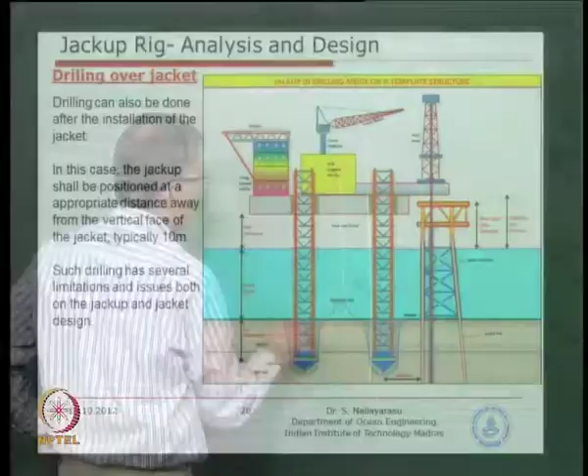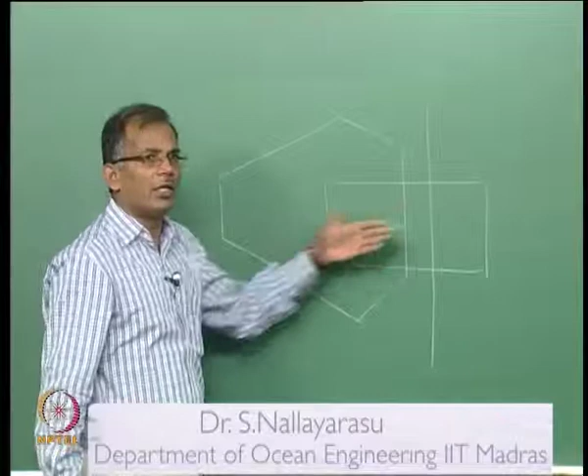Normally, when you arrange a well bay, the first thing we need to look at is which particular jack-up rig we are going to plan to drill with. Typically, I will make one sketch: this is the edge where the jack-up rig is going to come, maybe something like this, and the jack-up rig has the capability to travel in the direction of its length and also in the other direction.

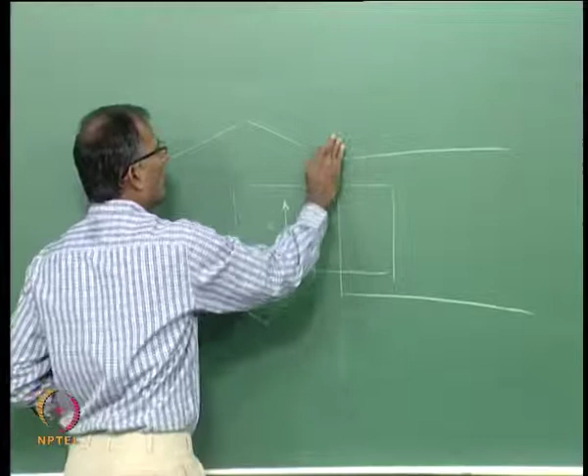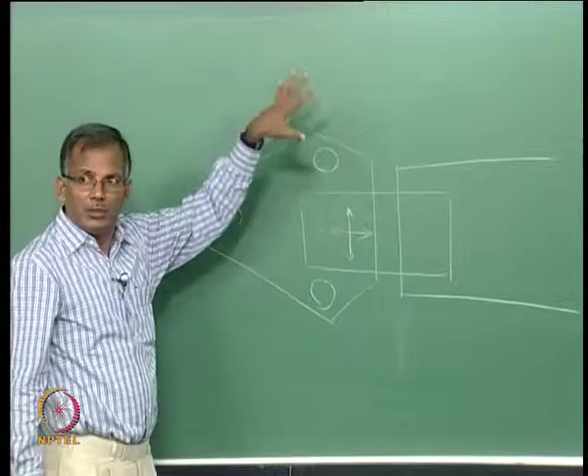Now, if this is your well platform, depending on what is the transverse direction the drill rig can move, because you are not going to relocate this jack-up rig. You keep the jack-up rig at the same location, not moving; only the mobile platform on top of the jack-up is going to move forward, backward, laterally, transverse in both directions.

Now, if this is your jacket leg, what will happen is you try to arrange, say for example, a 3 by 3 matrix of wells. Now, the distance between each well is the biggest question, depending on the diameter of the well and also the other equipment attached to it.

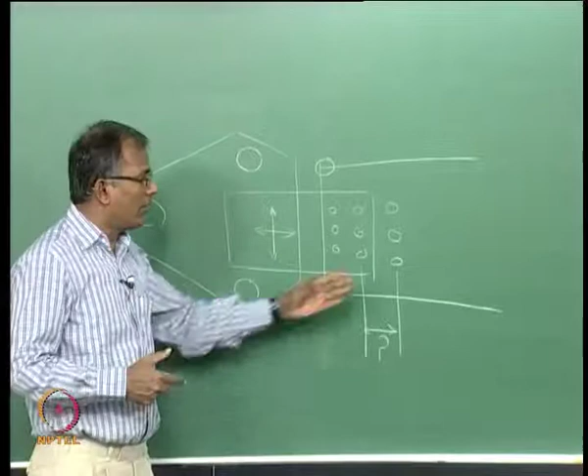I think I have shown you a picture some time back, an instrument called Christmas tree which is mounted on top of the well, which is basically a pressure and flow control regulation device with many valves. So if you draw a dotted line around what is installed on top of it, you can calculate the diameter of the obstruction-free space required.

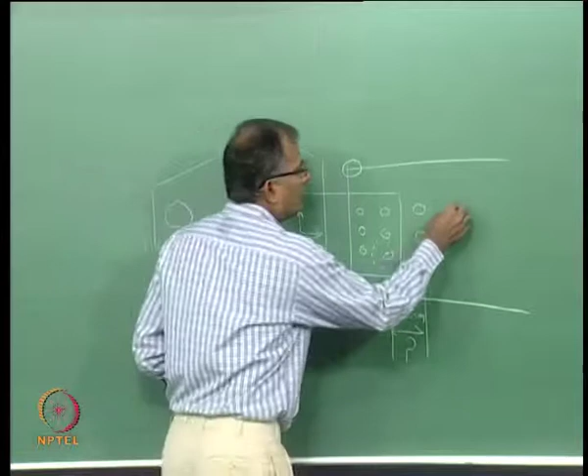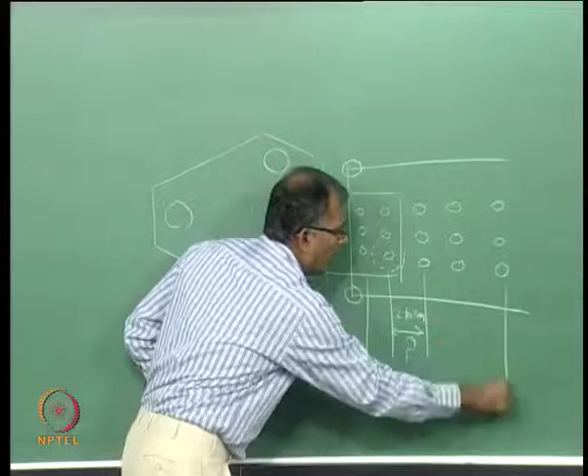Typically this is 2 to 3 meters. Now, imagine I want to have 20 wells; this will give you 15 wells. So I cannot keep on growing, because by the time I reach this well the distance would have already become 1, 2, 3, 4 into 3 meters, 12 meters, which the jack-up rig cantilever cannot reach.

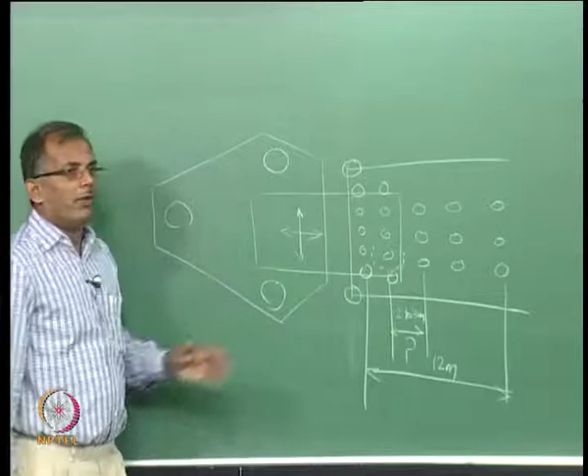So I decide to go, for example, for additional wells in the transverse direction, provided what is the travel mode of the rig, because on top of this, if I can travel this way too, I can achieve maximum number of wells.

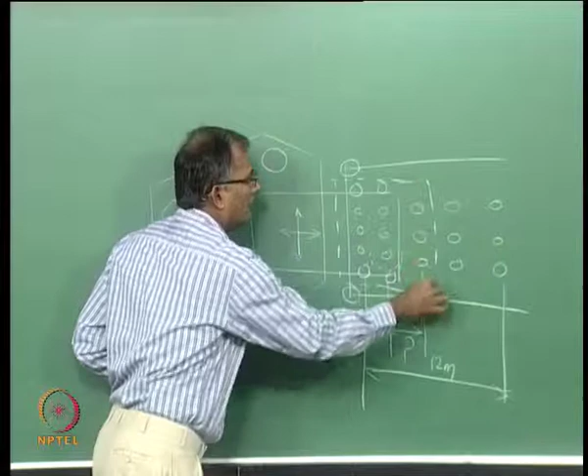So before deciding the jacket design you need to decide what jack-up, which are the potential possible jack-ups you can hire, because you will never know, you are not the owner of the jack-up, it is going to be hired by the oil company. Sometimes big oil companies do have their own jack-ups.

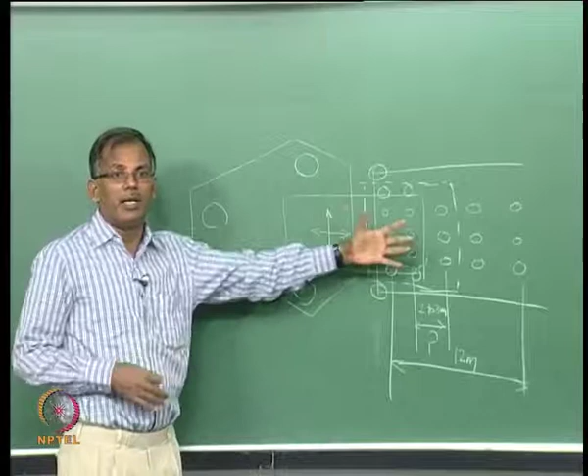So once you know which jack-up you are going to use, then you configure the number of wells and then design the jacket. So you can see the linkage between design of the jacket and the jack-up rig availability and suitability for that location. You may have a jack-up rig, but it may not be suitable for that location because spud can penetration is too much, or maybe the design is not sufficient.

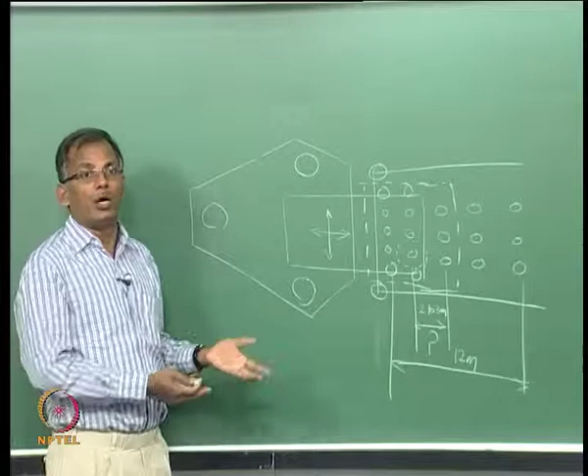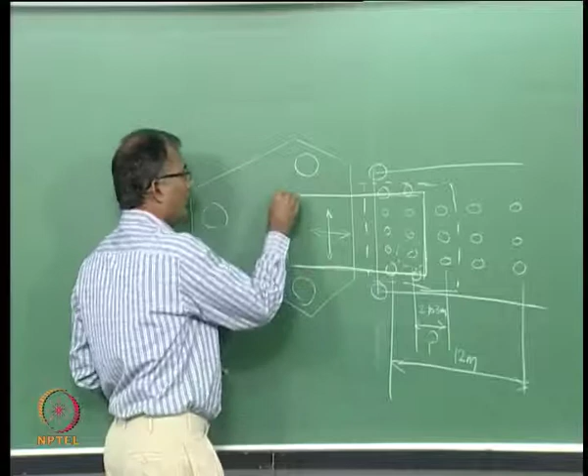So there are many complexities in arriving at the well configuration, all depending on the movable drill floor, its forward and backward movement and transverse movement. This is something you need to keep in mind whenever looking at a jack-up for the design of fixed platforms. For drilling purposes, you must look at the capability of the drill floor movement longitudinally and transversely. And as I mentioned in the other class, the height also matters.

For example, if you go to the Middle East, Gulf countries, so many offshore platforms are there. As I mentioned, the wave heights are very small because it is a sheltered area; maximum wave height you will get is maybe 11 meters, 12 meters. So the structure height need not be very high because the wave crest elevation is going to be smaller. So no issues with jack-up, because jack-up can go up to 23 meters, 24, 25 depending on the case.

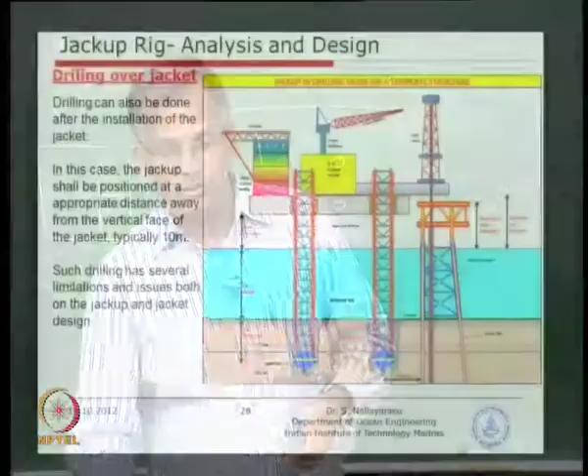Whereas when you come to some other locations, the wave height itself is 23 meters, then there is a clear space requirement. So the structure goes higher and higher, but jack-ups cannot get elevated so high because of the limited availability of leg length.

The same jackup can work elsewhere, but cannot work in other locations. So, you have to look at all these parameters, not just assume that any jackup can go anywhere and drill, which is not a realistic idea.

So, you need to look at all the parameters related to that particular location, starting from soil, sea state conditions, type of drilling, well dimensions - all those things need to be evaluated for each and every location when you are planning to do a jackup drilling activity.

Typically, the cantilevers for most of the jackups - the vertical face of the jacket from here to the distance between the jacket and jackup - is typically about 9 to 10 meters, depending on the design, because this really matters. The closer you go, the interaction between the jacket and the jackup is going to be more, meaning the disturbed soil will degrade the capacity of the jacket.

So, we want to keep it more spaced out, but if you keep it more, we have bigger issues with the actual purpose for which the jackup is designed, because the drilling becomes very limited. If you go too close, your jacket becomes a problem. You may also get into problem with the jackup, because there will be movement of the jacket itself, so the interaction becomes quite substantial. So, we need to find a balance. The typical number is about 9 to 10 meters, that is the kind of spacing we are looking at for most of the shallow water jackups.

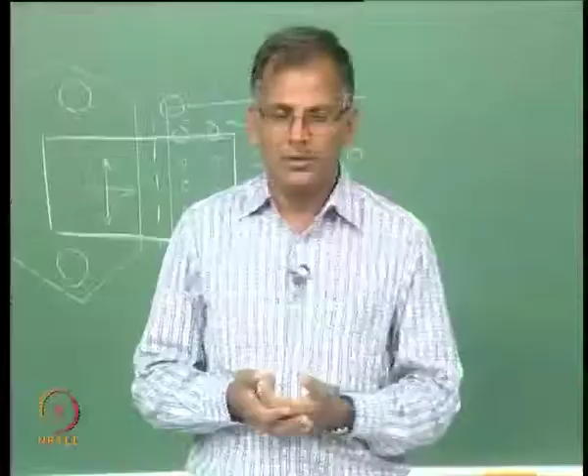Basically you can think of it again as the reverse process, but it is not exactly the reverse process, because you may not be able to pull out very easily, since all the soil has already collapsed into the pit created by the movement of the spud can during the installation.

So, what happens is, over a period of time - if you are drilling for say 3 months, 6 months, mostly not less than 3 months, because you don't want to mobilize a drilling jackup for drilling only one well, you will drill 3 wells or more - it may take several months.

So, during the process, the sea state conditions may change, wind conditions may change, and the debris and soil which actually came out during the installation may go back in, and also sedimentation of materials brought from elsewhere due to the subsea current can get deposited into the hole. So, slowly it gets consolidated and settles down.

So, what happens is, you have to pull this leg against the soil capacity, which we call the breakout force, to get the soil failure in the vicinity. This capacity could be substantially more than when you were installing - you were not encountering this problem then. So, what we need to do is figure out how to reduce this breakout force.

Either loosen the soil, maybe through a process of water jetting around the legs to loosen the soil. But a potential problem with water jetting is it could actually damage the jacket, because the jacket is in the vicinity, very close, 10 meters away. So, if the water jetting is not done properly, you may actually collapse the soil in the vicinity of the jacket legs, which makes the pile fail, and that is not very good.

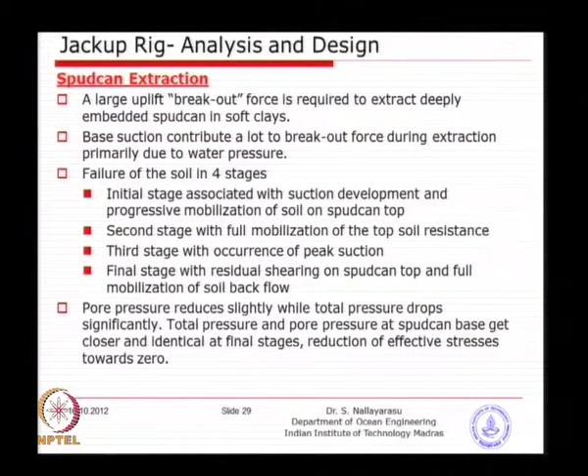So, the basic idea is - I have prepared a few sketches to show what really can happen - because the spud can is designed so it can go down easily during installation, with a downside cone with a very sharp edge which facilitates going down. But at the same time, we also have to have an upside cone, so that when it is trying to come out, it can also come out easily.

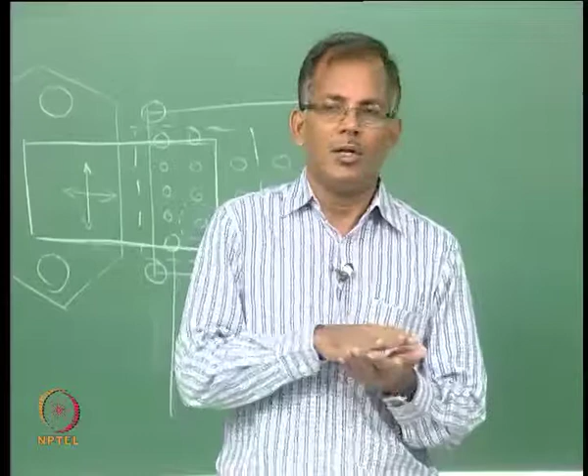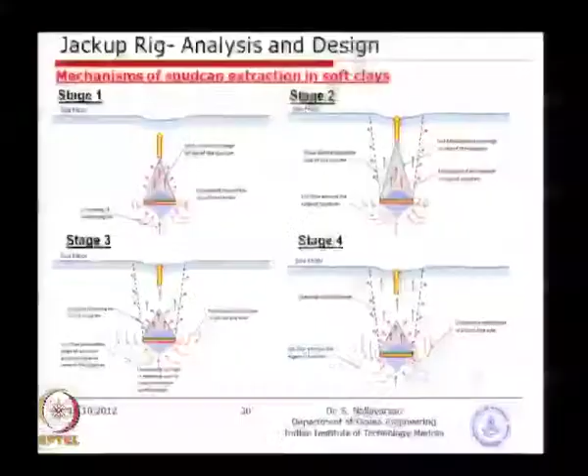Imagine if you have a flat surface, what will happen? It is very, very tough, because then you are actually going to lift off the whole soil, which will take a larger effort in bringing it out. So, you just make a slightly reverse tapering arrangement. These calculations need to be made depending on the type of soil, because not all soil behaves the same - if it is a soft clay, probably it will flow downwards when you are trying to move up, but if it is a stiff clay, it may actually get stuck to it.

So, depending on the type of soil material, the various stages you could easily understand how the failure is going to happen. Basically, if you look at stage 1, it is very deep below the mud line, and when it is trying to pull off, a cone of soil becomes part of the lift process. The leg is trying to come out and it carries that much of soil, and the breakout or so-called failure plane could potentially be the conical frustum, basically the conical surface around the spud can boundary. And stage 2, as you come closer and closer to the mud line, then what happens is the cone is there.

The failure is not going to be there because it has to come out. There could potentially be a failure surface elsewhere slightly away from the cone, which is shown in the dotted line you can see here. So this could be a possible failure plane which you have to break, so that the whole soil can come out and just come outside the seabed.

And basically, as you come closer and closer, a variety of things will happen. The soil will try to collapse, because by the time you have come to this stage, almost the plane has been defined, the failure plane has been defined by the process of movement, and the soil will try to collapse and come to the underside. And if this process happens very fast, there could potentially be a suction pressure at the bottom, basically because the hydrostatic pressure is say 100 meters, and you are trying to pull off, and that pressure could be acting against. So these are the things that we need to take into account when you are trying to pull off the leg.

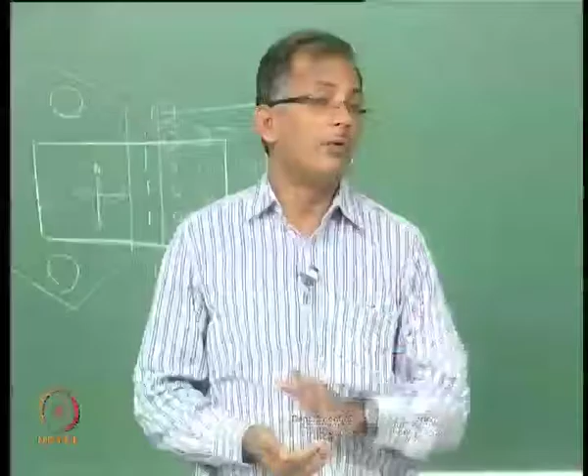So leave it for 3 months, 6 months. If there is a lot of sand transport - I think you might be doing sediment transport alongshore in your hydrodynamics course - if it is a coastal area, then a lot of sand material can get transported from one location to another, and get deposited. Then this is what normally happens.

You do not have that kind of prediction. When you try to come and remove it, you are unable to remove, because your winch capacity is already predefined. You cannot change it at that time. So that is the problem you may encounter.

So that is a situation where you will resort to water jetting, because you already have the jack-up there, you need to come out of it, and if unable to come out, then you have the auxiliary measures where you can jet water, loosen the soil, or just bring out a little bit of soil from below the mud line, and then try to remove it. This is the reason why we need to know how the spudcan extraction is happening.

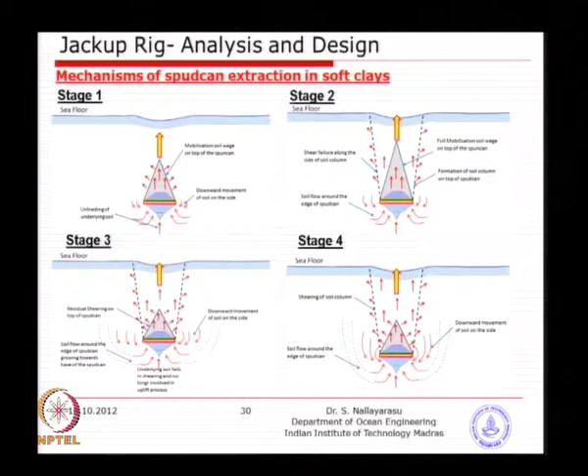This is going to affect the neighboring structures, because when you remove it like this, you may actually form a crater like this. Most of them we call a jack-up leg mark, basically the mark left by the leg after removal. So this will be permanently there. Of course, over a period of time, the soil might collapse slowly from the sides and may become a slight depression at the three locations, but over time it will get filled and may come to the natural state, but still the soil becomes quite loose, and that is what we need to know, because we need to understand what is going to be done to the jacket because of this loosened soil.

So typically for the drilling over the jacket, I think we have discussed most of the parameters - position of wells, height of the deck - I have just mentioned each of these parameters needs to be considered before arriving at which jack-up is suitable for this particular site.

So always, whenever you are designing a jacket for drilling by jack-up, you need to keep the vertical face one side. But if the jack-up is not going to come and drill, you do not need that, then you can make a jacket of symmetric configuration with all legs having 4-directional inclination, because anyway jack-up is not going to come since you have a drilling rig on top of the platform itself.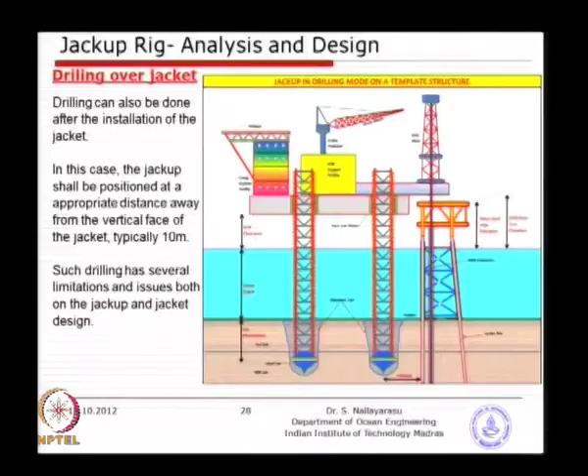So basically the jacket leg configuration cannot have any protrusion outside the leg. The meaning is, at this leg location, we do not want any structure projecting outside the vertical face of the jacket itself. This is very important to note down, especially below water, because below water is where your jack-up legs go and penetrate.

Cantilever support on the deck - how much the design of the drill floor extends is done by the jack-up people. Sometimes what happens is, the owner has a jack-up, but your well configuration, whatever I have drawn on the board, is such that I have to go a little bit beyond. So what can be done? Either I modify the jacket design or modify the jack-up design.

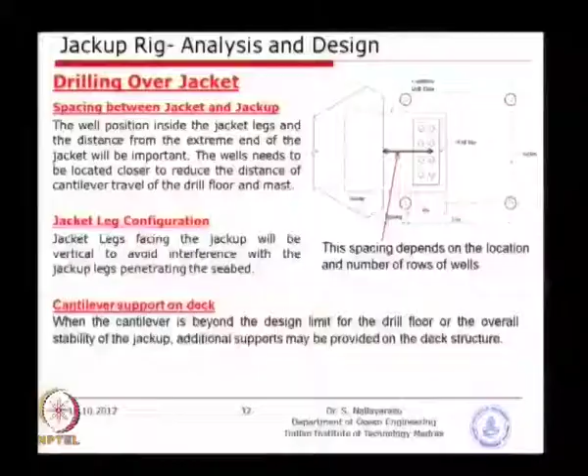The simplest idea is we could go and provide additional support to the cantilever rig. Many times we do this - instead of, say, the drill floor not being possible to extend beyond 10 meters, why not give a support from the jacket? That means we can go a little bit farther, because instead of cantilever it becomes a supported condition. So many times we do this exercise.

That means we need to find out what is the load transfer from the jack-up drill floor to the jacket, so that we could consider that amount of loading in the design of the jacket structure. This is also sometimes done because you already have the jack-up, you do not want to modify too much, and you still want to approach say another row of wells so that you can maximize your production.

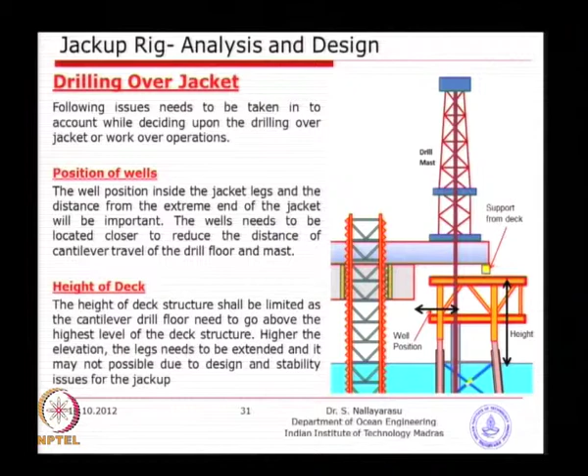What are the other aspects we need to look at when installing a jack-up at a particular location, especially the geotechnical aspects? First, we need to look at the hazards, which we are going to see in some scenarios that can happen. Basically the seabed conditions are most important - if a flat seabed condition exists, there is no big problem, because you will be able to install the jack-up very easily.

Suppose there are undulations - whether we should do a leveling before bringing a jack-up, or if that undulation is within the limits of acceptability, then you do not need to, because every time you want to do a leveling it is not an easy exercise, especially underwater removal of debris becomes expensive. So that is why we need to evaluate that type of situation which may come.

Sometimes what happens is you might do the leveling, but by the time you bring the jack-up there may be a gap of say 1, 2, or 3 months, and something else might have happened - some material transported from elsewhere, because sea conditions you can't predict. So there may be a small amount of material deposited between your leveling time and the jack-up coming in, which is an unknown condition. You might have thought it was already leveled perfectly, but when installing your jack-up at that time there is a little bit of an issue. So those kinds of unforeseen scenarios affecting the jack-up we need to evaluate.

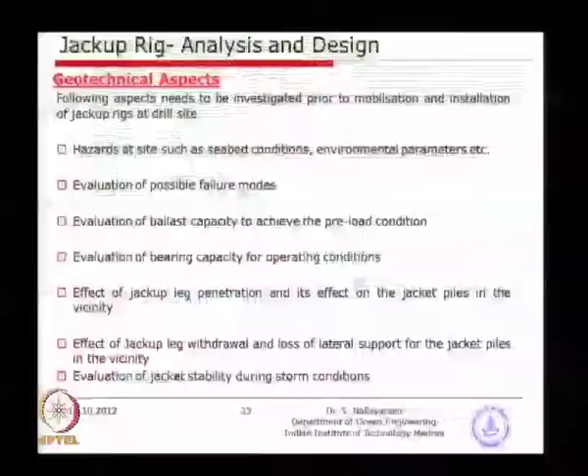So for a particular location, if you have planned X, Y, Z type of rigs for drilling, only those can be used. You can't bring a new rig unless it is very similar in behavior to the previously designated rigs. And then there's evaluation of jacket stability during storm conditions, basically because of changes in soil behavior.

What are the hazards? One easy to understand is hard material, like rock outcrop, though that's very rarely experienced, because you may not have even installed a jacket there - if there is rocky material at that site throughout the area, you may have planned a different type of offshore structure, because you may not be able to drive the jacket piles since the rock outcrop will not allow it.

But sometimes what happens is rock boulders - the jacket is in one location, but when you bring in a larger footprint required for the jack-up, one leg may encounter a big boulder that wasn't removed because it was a little away from the jacket, and people might think why remove it since it's far away. Or there may be scrap material dropped from barges, like pipes or other waste, simply dropped - many times people do this because bringing it back is more expensive than just throwing it there. So that could be a potential problem.

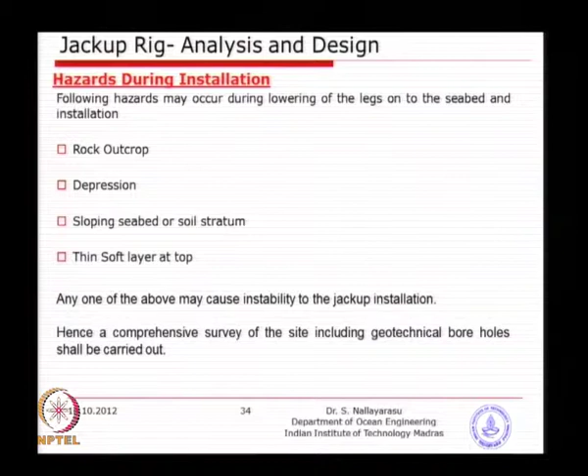A big depression, either naturally occurring or a previously made leg mark from a prior jack-up coming and going, and sloping seabed with a soft layer at the top - these are some of the scenarios which might occur, or more than this. So each time we need to evaluate this.

So what will happen when you have rocky or hard material - while the jack-up is trying to go down, one leg doesn't penetrate further because the material is very hard, while the other two legs continue going down. So what will happen? You will see a tilting of the jack-up.

With depression, it's a similar idea, except that leg might go faster than the others and not get adequate support, so it tends to tilt the opposite way. Consider soft material at a particular location, with three legs about 50 meters apart - one scenario I want to explain is how the soil profile changes, especially in subsea conditions.

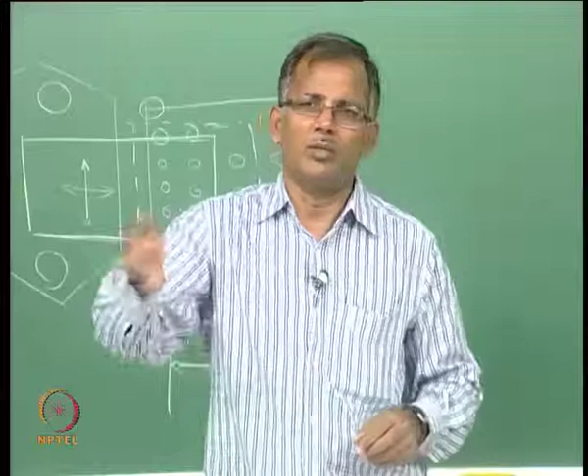The last time we were trying to install a jacket with 4 legs, the footprint leg spacing is about 50 meter by 50 meter. That means the diagonal distance could be slightly higher than 50 meter, and one borehole was done at the center. The soil investigation revealed a particular soil profile, and the pile was designed and installed. But at site, of the 3 piles there was no issue in driving, one pile was not going through, about 15 to 20 meters short, unable to drive within these short distances. So you could see the variability - assuming a central borehole by drilling a hole and taking a soil sample does not reveal the variations within that 50 meter radius.

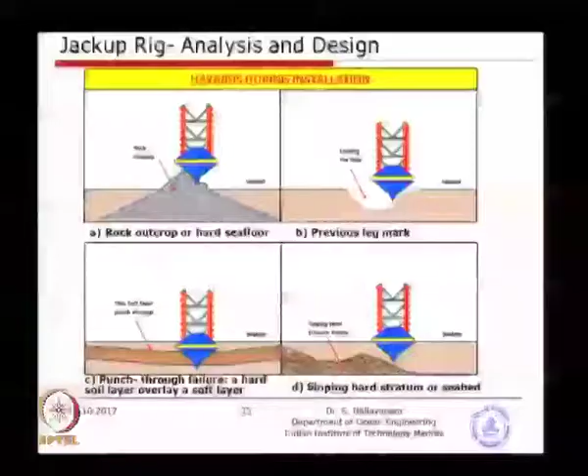So you could see that there could be a local pocket of variable material which could cause this kind of trouble for us. If you look at one of the legs 50 meter away, there's a local pocket of soft material, a thin layer, which may not be there in the other 2 locations. So one location is just punching through, the other location is supported very well.

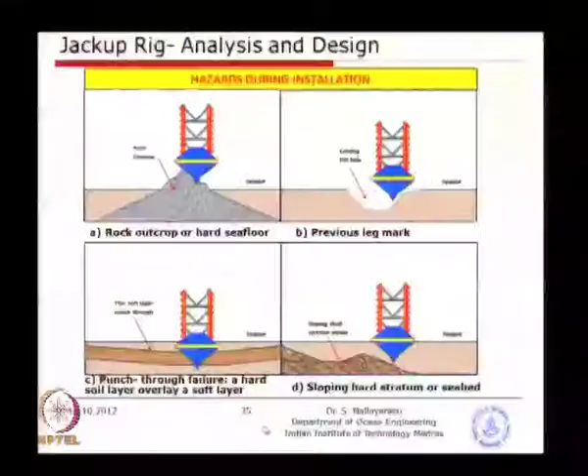If all 3 of them are punching through, it is no problem, because it is going down uniformly, stability may not be an issue. Whereas if one of the legs is trying to tilt, you will see that the jack-up will become unstable and collapse. Also sometimes there's sloping subsea strata - seabed is very good, but the strata is inclined.

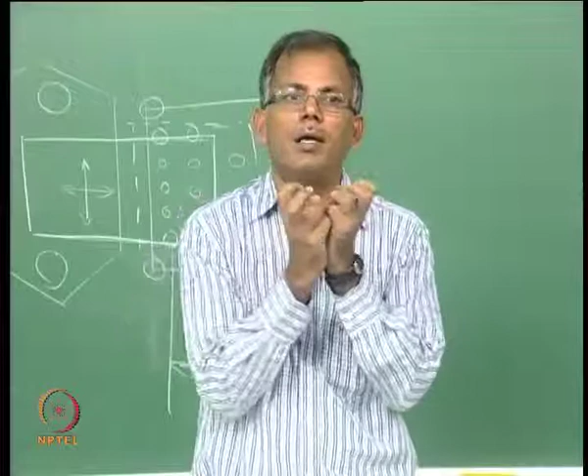This is what normally happens even in the case of conventional pile driving, everything seems to be perfect. When you are driving against a sloping surface, the pile goes and buckles at the edge, and then you will see that the pile is going easy.

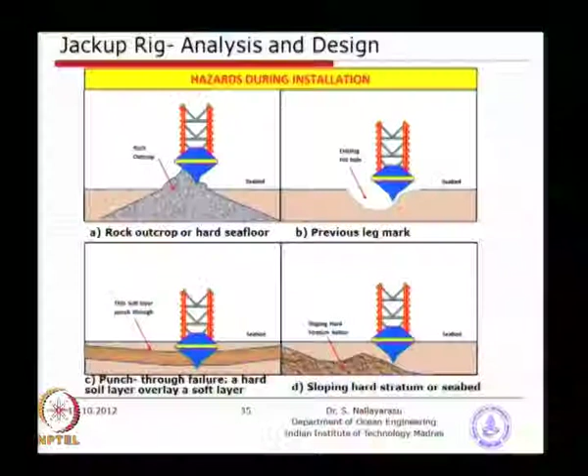In fact, in one project, the pile was being driven exactly like this - there was a sloping stone at 60-70 meters below, and when it was trying to hit this surface, the material was so strong that it was not allowing any penetration to go vertically. So what happened is the pile was trying to buckle against this inclined surface and going very easy. There was a resistance basically encountered by the pile driving, which could be noticed from the number of blows required, but later it was going easy.

So the contractor was thinking something had broken - they thought it had broken through the hard material and was going down, but without realizing the pile was buckling and there was a clump of material where the piles assembled or accumulated together. This is why it was going very easy, but it was not noticed until the blow counts became so small, and in one blow it was going very fast. Then they decided to investigate and found that the pile had already collapsed because there was a big boulder just below, so many meters into the ground.

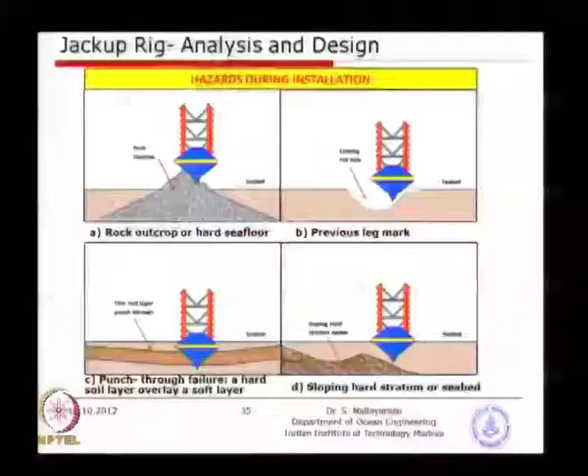So you can see this type of condition could also potentially be a problem for the jack-up, because this leg will go and get stuck, while the other 2 legs may keep penetrating because the load is going there, trying to collapse there. So this process of installation and monitoring of all the legs and positions is vital to the safety of the jack-up.

The other thing that may happen is basically a small rotation causing a large moment, because this is a non-redundant system - it could cause complete failure depending on the differential settlement of the legs. Even when everything is perfect...

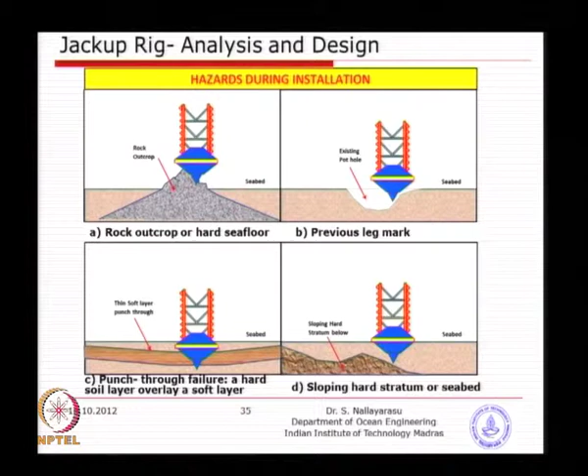We have seen only 4 cases of possible scenarios, but even if none of them are there, a slight change in center of gravity - for example, if 3 legs are there, and if the COG of the system is eccentric to one side - increased loads and increased deformation of the leg can cause differential settlement.

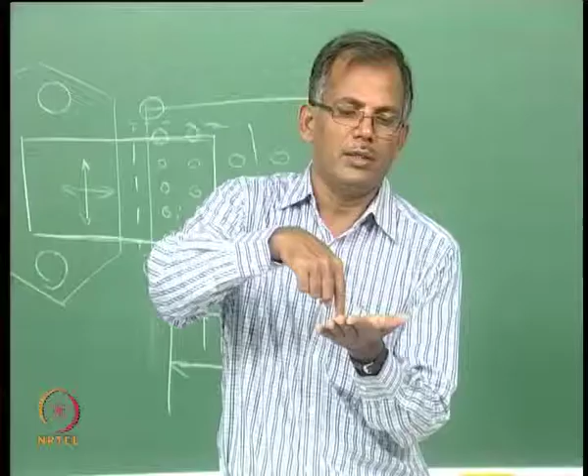Now, going backwards, you can see in the design of the superstructure facility for the jack-up, the COG of the system should be kept in mind, because you have to keep it within the center area, so that you do not have too much load difference between the 3 legs.

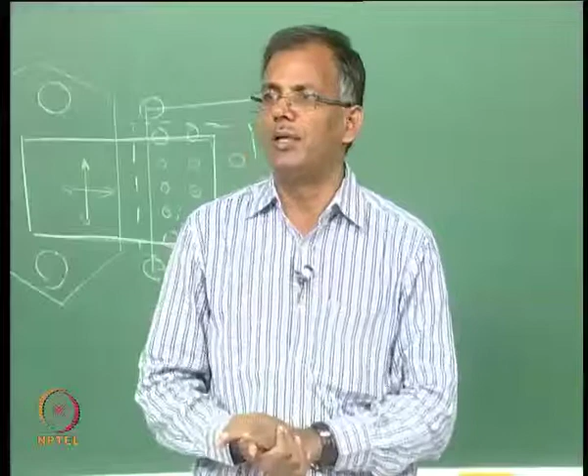Normally, when we design fixed structures, we do not worry about this - you can have as much load, as much penetration, as much foundation design as needed. Whereas for this kind of mobile system, you must make sure that when designing a jack-up, the COG of the system has to be kept as close as possible to the center of gravity of the triangle, so that the loading between the 3 legs is not too much different, to avoid this kind of rotational failure, which is very important.

That means when you are configuring the legs, the hull, the pontoon locations and the superstructure - for example, you come up with a superstructure where the center of gravity is not exactly at the center of the triangle.

So, what can we do? We can do ballasting on exactly the opposite side, so that you can bring back the center of gravity. So you have a manipulation methodology just to make sure COG is controlled, but despite all this, if you still have differential settlement of the legs, it could be very small, but can cause tremendous effect because of the length of the leg, and the moment created at the top can simply collapse.

Several locations this has happened, basically jackups collapsing against existing jackets. In the 1980s at least several of them collapsed against existing well platforms because of simple stability issues. Though the soil is good and verified, it was unable to stabilize because this kind of disturbance can cause rotation of the structure.

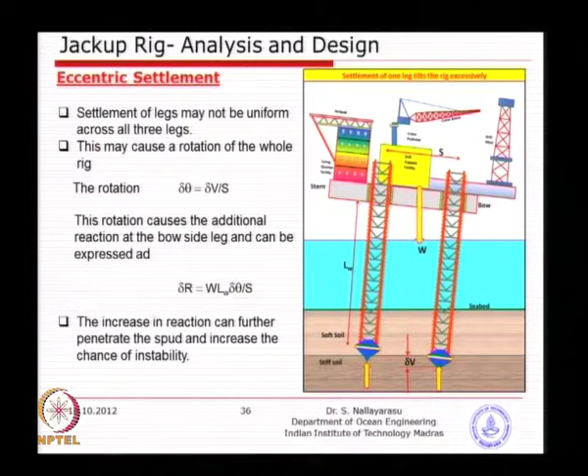The other instability which we just discussed is installation on a sloping seabed strata. Basically one leg gets full bearing, the other is not getting bearing. So what will happen is it tries to destabilize the system and then collapse against the jacket. This is also a cause for worry.

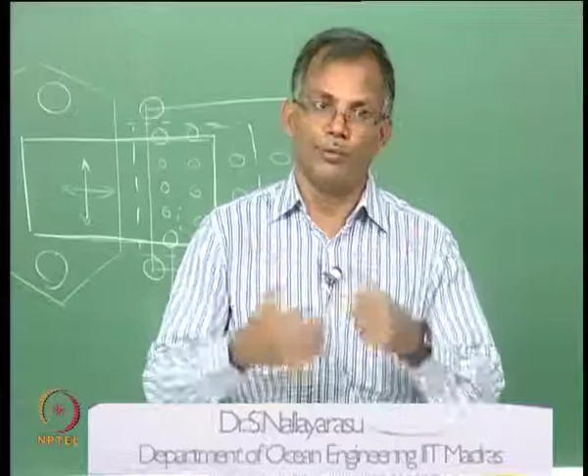That is why when you design a jacket we do one borehole, but when we do installation of a jackup we always look for more boreholes, maybe 2 or 3, so that you also look at the variation of the profile of the substrata below, to determine whether it is safe to install or unsafe to locate there. So basically that is the idea.

If there is such a situation, what can we do? We have to pre-plan it. So increase the weight here before it goes there, so that the penetration becomes more uniform. You do a ballasting on that side, so that you control it. All these calculations need to be made depending on the situation there.

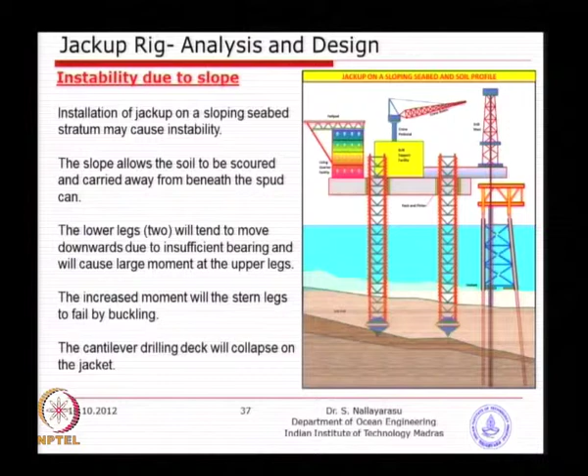What are the failure modes? By this time I think you would have understood what type of failures are expected depending on the type of soil, and mostly since jackup legs cannot penetrate through rocky bottom or sandy material, predominantly clay type material is used. So the only matter is whether the clay is uniform or has several layers of different strength.

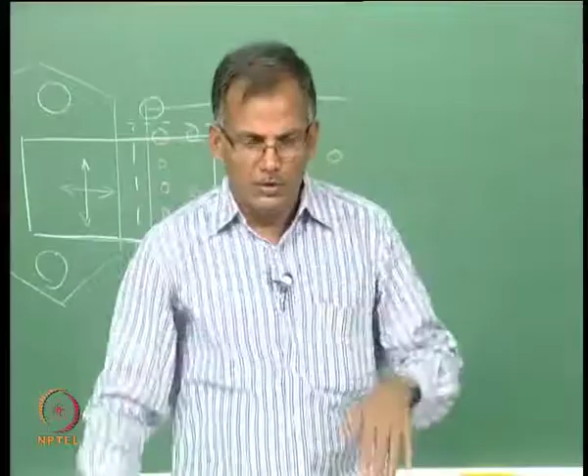So if it is good soil, when the spud can goes down, the lower bottom cone can just penetrate, but then you get full bearing of the circular mat foundation. If substantially good soil, you may not even penetrate, it just gets enough bearing capacity.

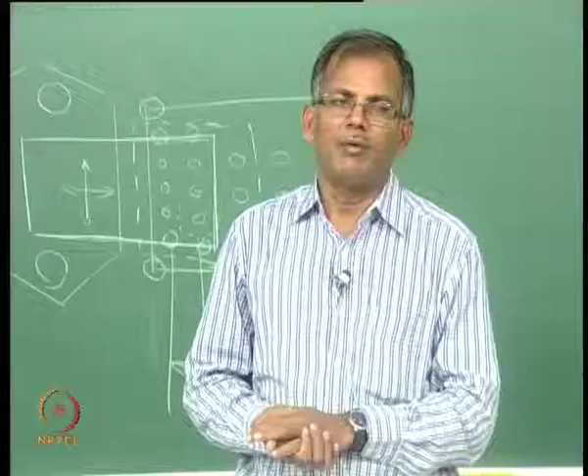Or if it is very soft clay, like when you step into a muddy area, your leg goes down. You might have experienced this in several places in the coastal zone. It is like less than 5 kPa, kilonewtons per square meter. That means with 500 kg loading, it will simply sink. So that is the kind of soil we are talking about.

In such a scenario, the clay will try to squeeze and bulge away on the circumference of the spudcan. So depending on the type of soil, the behavior is going to be different, but eventually, as the leg moves substantially down, this soil is not going to stay like this, it is going to collapse and come on top of the spud itself.

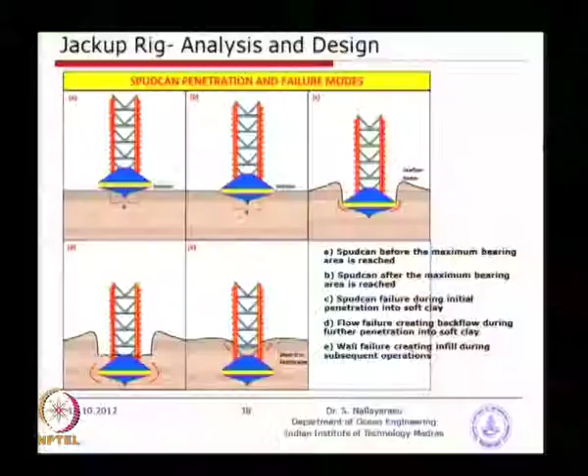This behavior depends on whether it is a single layer or multiple layers, very soft or medium clay. So you require a numerical model. Simplified calculations using standard foundation design may not work for us. So most of the time for this type of study we use 3-dimensional finite element programs to simulate the behavior under varying strata conditions.

That means more than a fixed structural system, every time you are planning to mobilize a jackup to a particular site, the amount of work done is enormous.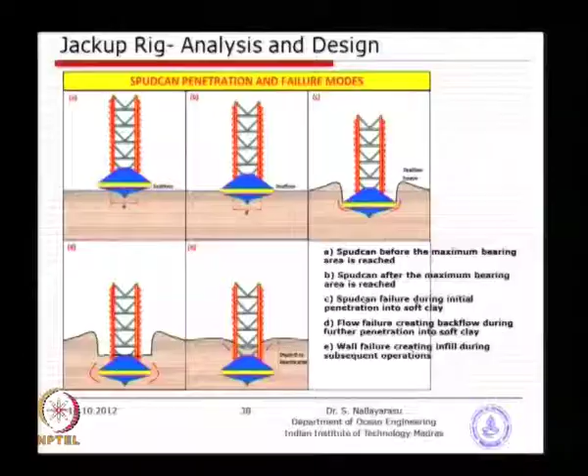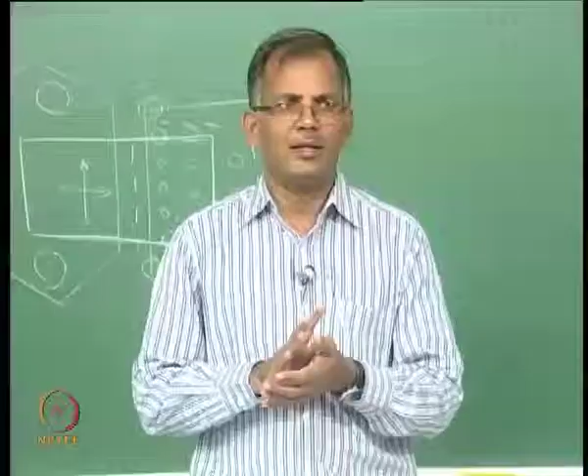How do we evaluate the bearing capacity? Since we are introducing this subject in the next semester, we may not want to go into full details of this aspect now, but most of you are civil engineers, and must have studied soil mechanics, basic soil mechanics in your course. So we will just introduce this and spend maybe an hour on it tomorrow.